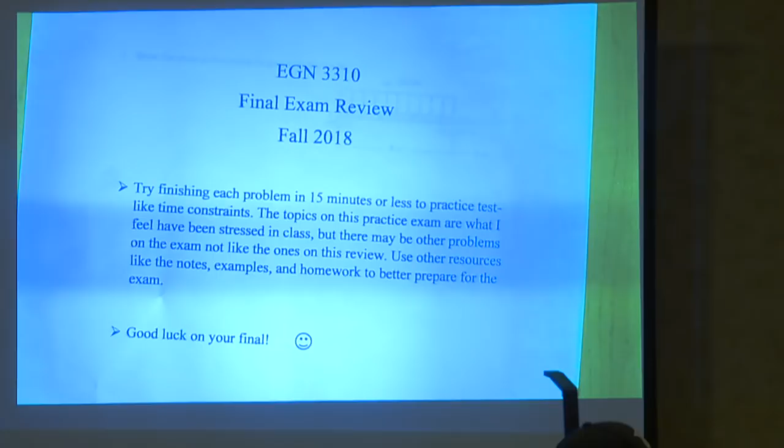Because I just want to say thank you, because I probably would not be passing this class if it wasn't for you. Really? Oh, I'm glad. Thank you, all your reviews and stuff, they've been the best. Oh, really? I'm glad. Because the first 2 reviews, I don't have to do those, but I like to do them. This one I have to do, but I love doing it. The ones you did, thank you so much - I didn't even know that was required of your job. Thank you so much, they saved my ass. I'm glad, all right.

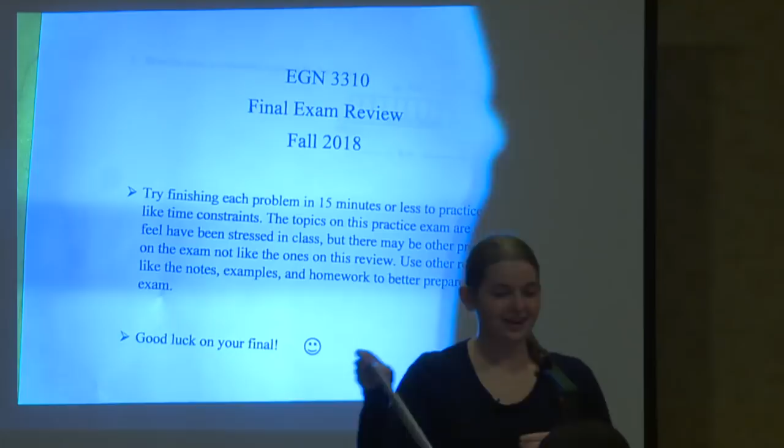How am I? I'm good. How are you? I'm fine. How are you? No questions?

Okay, cool, so is everybody able to find this online? Okay, so this is posted there. I will be posting my solutions after the review. The link to the recording for this is also there, so everything that you should need, you should be set. So on my WordPress site, if you just go to Google and type in UCFSI, click on the WordPress site, click the CECS tab, and then Statics with Tiffany, and it'll be right there. Cool, all right.

All right, oh, and go ahead, if you have your calculators, go ahead and pull them out, just because I want to make sure you guys can calculate them here. So if you're not used to using a particular type of calculator, make sure you can get the right answer here, so that way you'll be fine on the exam. So if you have your calculators, please pull them out now.

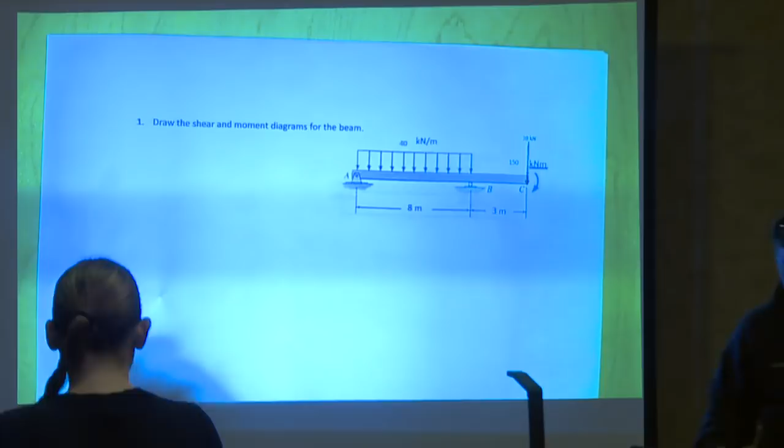Oh, that's a moment right there. Okay.

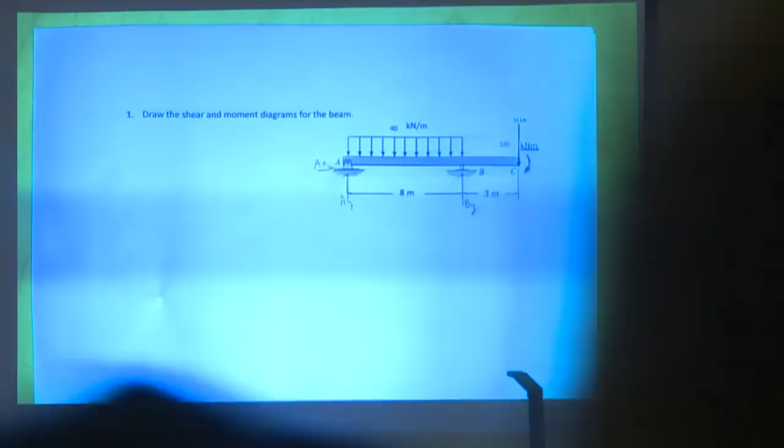No. So for the shear diagram, shear forces are what direction? Straight up and down. So that one's horizontal, so we don't need it, and it goes through every single point that we could possibly take the moment about. So either way it'd be 0, wouldn't be included in our equation, so we don't even need to worry about it. So which support reaction do you want to solve for first?

By? All right, so how do we solve for By? Take the summation of moments about A. And what do you want our positive orientation to be? Counterclockwise positive. So what should be in our equation? So By, positive or negative? Positive. So we have positive By.

What's its perpendicular distance away from A? 8 meters. So 8 meters. I'm sorry for you guys this way. So By times 8 meters. What else do we have?

So minus this 20. And what is its perpendicular distance away? 11 meters. What else? Applied moment at the end. So the applied moment at the end, the concentrated moment. Which direction is that acting? Clockwise, so it's opposite of our assumption, so it will be negative, so minus 150 kilonewton meters.

Do we need to include anything else? Distributed load. So what do we call this force right here? Is it a concentrated force? No, it's not a concentrated force, but it's an equivalent force. So get into the habit of saying equivalent, because whether it's a concentrated force or not, you'll need to know for your shear diagram. So that won't be like a jump up or down, just keep that in mind.

So what will the equivalent force be? 40, so times it, so 320 kilonewtons. Is that going to be positive or negative? So we have minus 320 kilonewtons times its perpendicular distance of 4 meters. Do you have anything else to include in our equation?

Nope, so we set it equal to 0. So then what do we get for By? If you have your calculators out, go ahead and calculate it, just make sure you get the right answer. 206.25. So is that positive or negative? Positive. So what does that tell us about our assumption? It was correct. We assumed it was going up, we get a positive answer, matches our assumption, so it is going up.

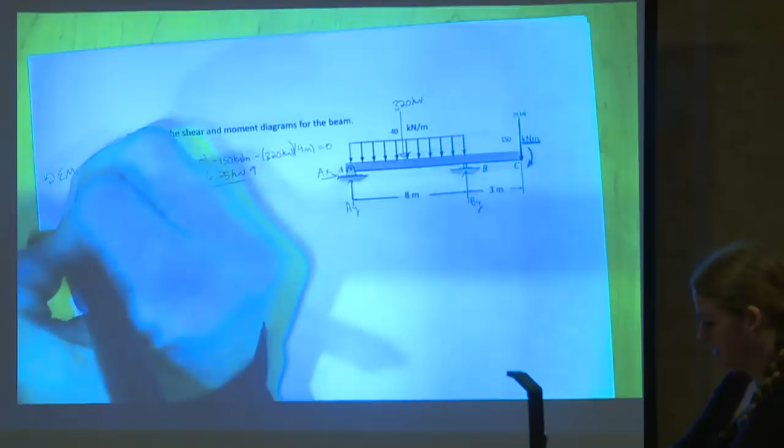All right, so what do we do now? Summation of forces in the y direction equals 0. So what are we going to have in this equation? AY. What else? Minus 320. Anything else? Plus By, which is 206.25. Anything else? Minus 20. Set that equal to 0. What do we get for AY?

133.75. So that's positive, so it matches our assumption. More tables and chairs are on their way, don't worry.

So now we have our support reactions, the only ones that we care about. All right, so what do we do next?

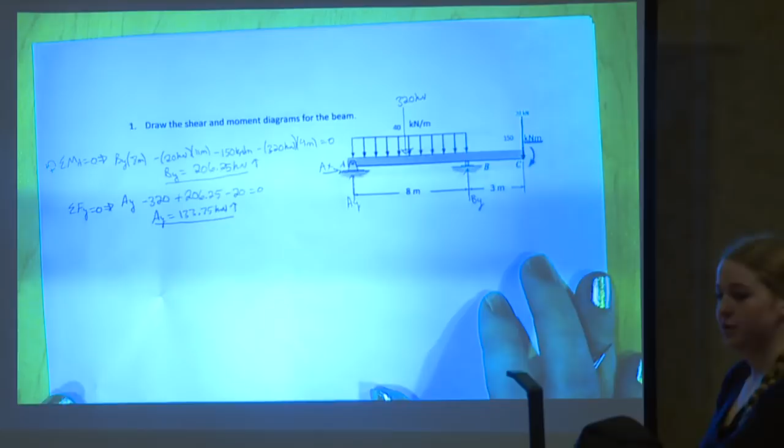So discontinuities, draw the lines. Just start drawing the lines. So where do we draw the lines on our diagram? Anywhere there's a discontinuity or concentrated force, basically you're looking for points of interest.

So what are some points of interest? Where it starts, where it ends, applied moments. So there's only one applied moment at the end, and we already have a line there, so you don't need to worry about that.

Where else do we need to include the line? Distributed load begins and ends. So we have one at the beginning, so we need one at the end. Anywhere else?

If there's a concentrated force, there's one right here, but we already have a line. Concentrated force, already a line, so we don't need to worry about any others. So then draw the lines for the shear. This is V of x, and this would be M of x for the moment.

Okay, what do we do next? Start sweeping from left to right. So I'm going to go ahead and write: integral method.

Okay, so what's the basic setup for the integral method? Where do we start? Point, and then what? Point, then span, until we get to the very end. So I'm going to draw a little line.

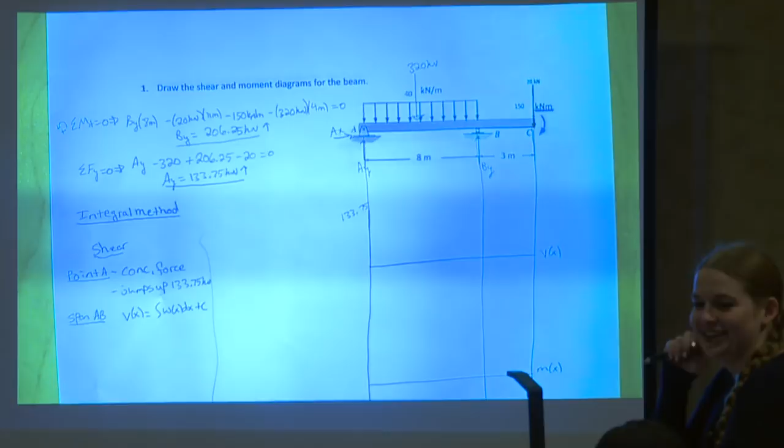Does the equation of a line sound familiar? So we need the slope, the equation of a line. So omega x is equal to y, which is equal to mx plus b. All right, so what is the slope?

40. So think slope is rise over run. So how much does it rise? It's not rising at all, it's constant. So since there's no rise, m is 0.

But what does b represent? The y-intercept, so we're looking at the left-hand side. So what is the y-intercept? 40, so that would just equal 40. So we bring this equation back down: the integral of 40 dx, and then C was 133.75.

Now, do we need to include anything else in our equation? A negative sign. Where do we include that? Only on the integral, right in front of it. Be careful not to distribute that negative to the constant, it's just on the integral. Why do we have a negative sign there? The distributed load is pointing down, so it's a negative shear, so you have to include that negative sign. If the slope is negative, you include the negative sign in the integral, but if it's going down, you'd also need the negative on the outside and distribute accordingly. Does that make sense?

Okay, so let's say we have a distributed load like that, like the triangular one. Now the slope of this, is it positive or negative? It's negative, so your m would be negative. So if you have the integral and you have like a negative mx plus b or whatever, you'd also need to include the negative since it's going down on the outside, and distribute that negative to the mx and the b, since it's the entire equation of the line you plug into the integral. Make sense?

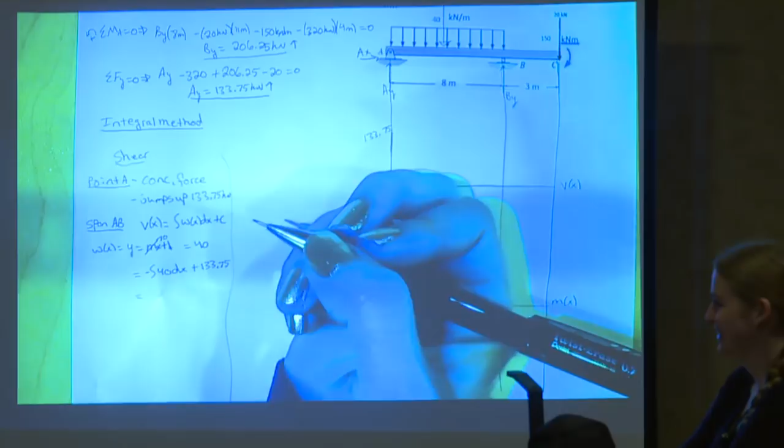Okay, so back to this one. We have our integral. So what do we do with that integral? Integrate, right. So what would we get? 40x, negative... so minus 40x plus whatever. What's the whatever? 133.75. Plus 133.75. Thank you, Cole. So that's our shear equation.

So what do we do with it? Use it at the point. We need to evaluate it at the start and the end point. So what's our start point? 0. And what's our end point? 8. So at x equals 0, shear is equal to what? 133.75 kilonewtons, and if we look back at our diagram, that checks out with what we have, so that's good. And then at x equals 8 meters, how much is shear equal to? Minus 186.25 kilonewtons. So we have our value at the start and the end, but how do we know what it's going to look like getting there?

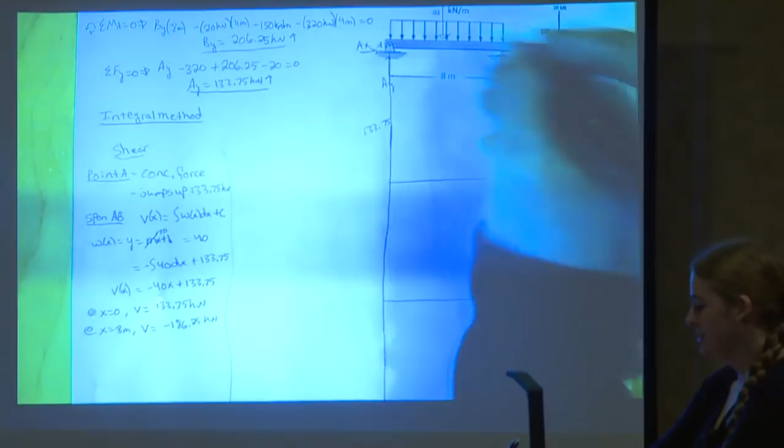What do we do next? Well, you can use that value. Do we need any other information here? So we need to find this distance. Why do we need to find that distance? To figure out where your maximum moment is. So whenever shear is equal to 0, what are we going to have? A max moment. So in order to find the max moment, we need the distance. Thank you. All right, so how do we find that value?

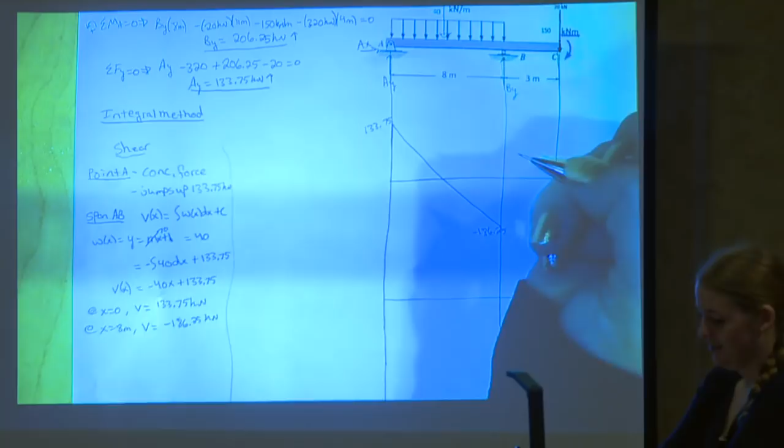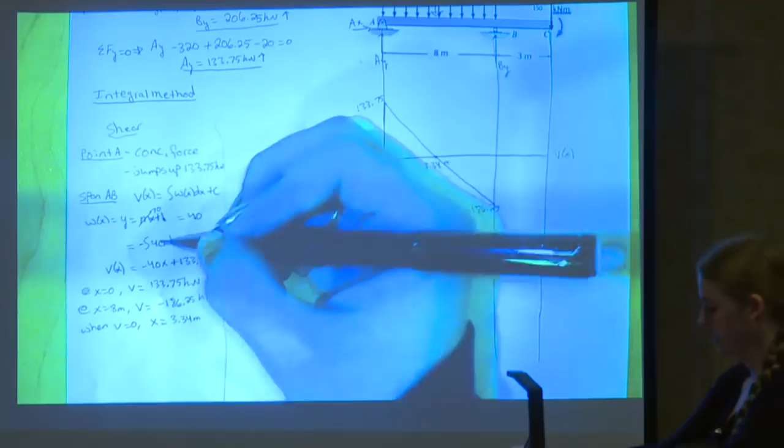So we set v equal to 0. So when v equals 0, x is equal to what? Plug in a 0 for v right here, and then solve for x. So it would be this divided by 40, which is what? 3.34 meters. All right, so that is 3.34 meters. How did we get that? We know that when shear is equal to 0, we have a max moment. So if we go back to our equation, plug in a 0 for shear, then we can solve for x. Move the 40x over, divide 133 by 40, and then we find it.

All right, do we need anything else for this span now? No? So where do we go next? Point B, back to point span, point span. So at point B, what do we ask ourselves at a point? Is there a concentrated force at B? Yes, so there is. So what's going to happen at B? It's going to jump up, by how much? By the value of B, which is 206.25 kilonewtons. So what's that going to give us for a value? Where are we going to end up right here? We're going to end up at 20. All right, do we need to do anything else for that point? So where do we go next? Span BC.

All right, and what do we do for a span, for the integral method? Nothing, why? So there's nothing there, there's no load whatsoever, so we can say that there is no change. So it's going to be what? Constant 20. So a constant of 20.

All right, so we go back up here, draw a straight line over, and then where do we go? Point C.

All right, so what do we ask ourselves at a point? So is there a concentrated force? Yes. So what's going to happen? So it's going to jump down by how much? 20 kilonewtons. So we go back up here, jump down at 20.

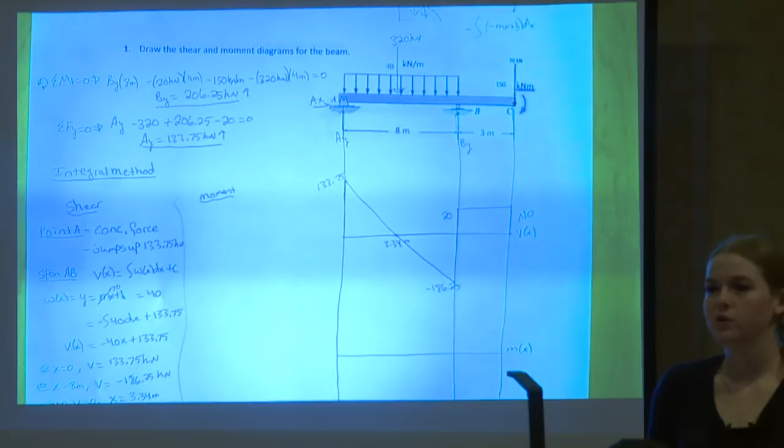All right, so what do we do for moment? We use the shear diagram. So we use the shear diagram. So do we do the same point span, point span? Yes, so we look at point A.

Now what do we ask ourselves for moment? Is there an applied moment? So is there a concentrated moment at A? No, so there's no concentrated moment. So what's going to happen? Nothing, so no jump.

All right, so we do point. Now what's next? So span AB. All right, so what do we do for span for the integral method for moment? So the integral of shear. So m(x) is equal to the integral of v(x) dx.

Anything else? Plus c. Now what is the plus c in this case? 0, because the left side of the span we're looking at was 0.

All right, so what was our equation for shear for that span? So minus 40x dx and then plus 133.75. Well, that was for the other ones. We include that. Yeah, so don't be like me, make sure you include it in the entire thing. And then the plus c was 0, so we just leave it like that.

All right, so if we integrate that, what are we going to get? So minus 20x squared plus 133.75x. All right, so that's our m(x).

So what do we do with this equation? So plug in the endpoints, which is what? So 0 and 8 again. So we can say that x equals 0. Shear is equal to what? Moment is equal to what? 0, which checks out with what we have on our diagram.

So that's good. And then at x equals 8 meters, how much is moment equal to? So minus 210 kilonewton meters. All right, so we know we need to get from here to negative 210.

So how do we know what that's going to look like? The circle, so now we use the circle. So what's the mnemonic for that? Please don't neglect infants, neglect dumb people instead. I'll draw that bigger next time.

All right, so how do we use this? Look at your shear diagram. So we look at our shear diagram. Do we look at the entire thing? No, so we're going to look at this section first. So is this section positive or negative? Positive, so it's positive. Is it increasing or decreasing? Decreasing. So it's going to be positive decreasing, so it's going to line up with that one right there. So we know it's going to be something like that.

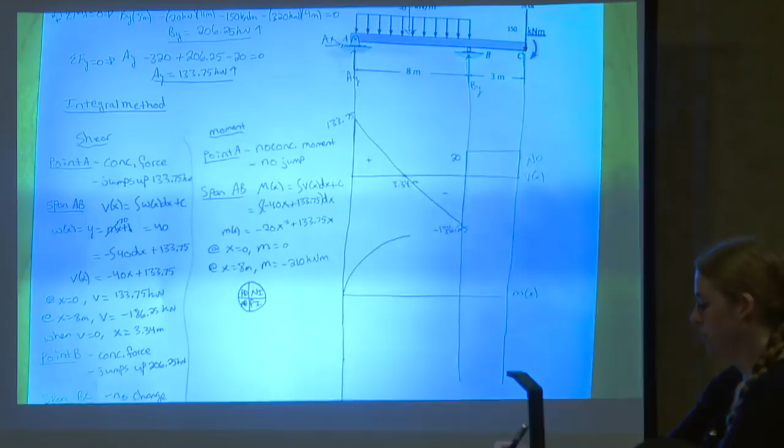All right, now we look at this one. Is this one positive or negative? Negative. Increasing or decreasing? So it's increasing. So you're going to look at the absolute value of it. So even though it's getting like a more negative number, so like a smaller number, you look at the absolute value. And if you just draw the arrows left to right and it's getting bigger, then you know it's increasing. So negative increasing will look like that. And then we know we need to end back down to negative 210.

All right, do we need anything else for the span? The max moment, so the max moment. So how do we find the max moment? Evaluate it. So we evaluate that equation at 3.34 because that's when shear was equal to 0. So what do we get? 223.61 kilonewton meters. So this value, so this is like right there, so that point is 223.61.

All right, now are we done with this span? Yes, so now where do we go? Point B. So is there a concentrated moment at point B? No, so what's going to happen? So no concentrated moment.

So no jump. All right, so then where do we go? Span BC.

All right, so what do we do for a span? So we use the integral, which equals the integral of v of x dx plus c. All right, what would our plus c be in this case?

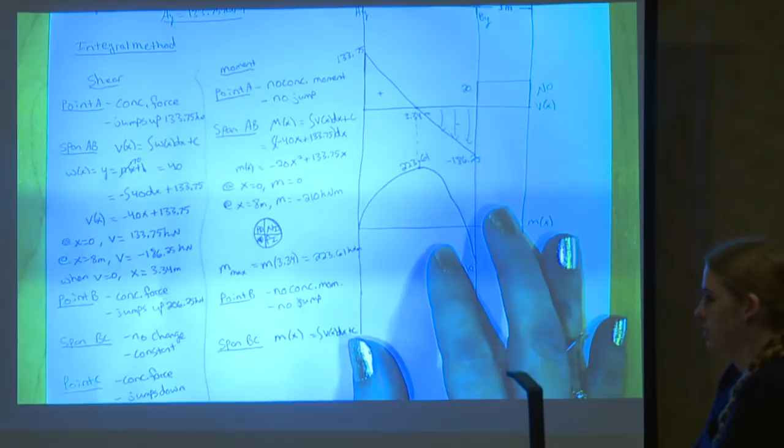Minus 210. Now over here for BC, for the shear, we didn't have an integral, but what would it be? How would we figure that out? Yeah, so look at our shear diagram.

So if you look right here, this is our shear, like a rectangular distributed load. So if we were to solve for omega x doing the equation of a line, what would the m be? 0, because there's no rise, that would just be 0.

So we just have our plus c, which is 20. Now would that be positive or negative? Positive, since it's above the x-axis, or like where the 0 would be. So we have the integral 20 dx plus or minus, in this case minus 210.

All right, so what's the integral of that? What's the integral of 20 dx? So just 20x minus 210.

Now, do we need to include a negative sign outside here? Why not? Yeah, so we included shear in this equation, and we already include the negative sign in the shear, like if there was one. So we don't have to worry about that.

All right, so what do we do with this equation? So evaluate it. So at x equals 0, what is moment? So minus 210. So if we look at this point, that matches up with what we have on the diagram, so that checks out. And then at x equals 3 meters, what is m?

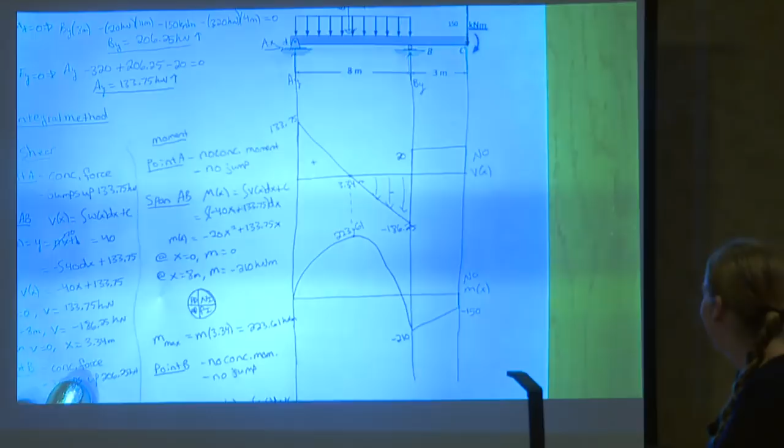Now what do we do? Yes? No. All right, now since we know we need to end up back at 0, and we got to this point, like let's say we look at the moment and we're like, which way does it jump? In this problem, it's easy to tell because we know we need to get back up to 0, so it's going to be a jump up.

But what if it was in the center somewhere, and we couldn't tell if it's going to be a jump up or down? What's the typical orientation? What do you think? So clockwise is a jump up.

So I know it's kind of opposite of normal convention. So what I just remember is it's opposite of your typical orientation. So like normally we consider counterclockwise as positive, but in this case counterclockwise is a jump down, and clockwise is a jump up.

So that's how to do that. Yes. So clockwise is always going to be a jump up, and counterclockwise is a jump down. Now, does it matter when you're doing this type of equation? No. So in this case, you can assume whatever you want. You can assume counterclockwise or clockwise, but for the concentrated moment, you have to use that convention.

Okay? Any questions on this problem? Counterclockwise is a jump down. Yes. Okay, any question? Yes.

How much work? So if you want to do it like this, just do this. So like if you do the point span, say point A, just say no concentrated force, or if there is a concentrated force, jumps up or down by this much, do it on the diagram. And that's good. Yeah, as long as you write it out. So like right here, span BC, when there was no change, just be sure to write no change, constant, so that way he knows what your thought process was. Yeah, that's good enough. All right, any questions?

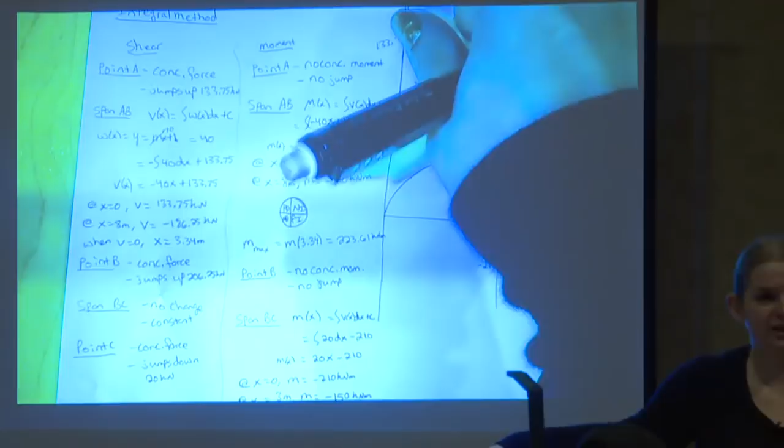It's a lot easier to do if you have a rectangular distributed load. If you have the triangular one, it's pretty easy to do the shear. But once you get to the moment, you have to know how to find the area of a parabola or something. So that's how you do that.

Any other questions? No? Okay, so we're going to move on to the next one. So what type of problem is this one?

Another shear moment diagram. All right, so what's our first step?

Can you guys quiet down so that way everybody can hear, please? Thank you. All right, so shear moment, so what do we do?

Or like what method? Integral, because that's how I did it. All right, so what do we do for the integral method?

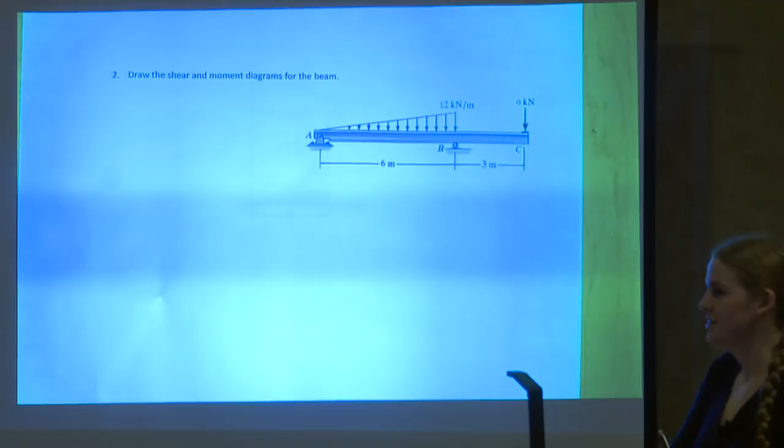So the reactions, so what type of supports do we have? So pin and a roller again, so we have 2 for the pin.

AX, do you even care about AX? No. I'm still going to draw it though. BY. All right, so what do we do next?

So go, whatever I want. So draw the lines. So where do we draw the lines?

So the beginning and end. Where else? So at B, YB. So it's the end of the distributed load, and there's also a concentrated force there.

All right, anywhere else? Nope, there's no concentrated moments. That's the only concentrated force there, there, and there, so we have all bases covered. So we draw lines for shear.

All right, so what do we need to do now? So find the support reaction. So which one do you solve for first? So BY. So we take the moment at A, and we'll just stick with our normal convention.

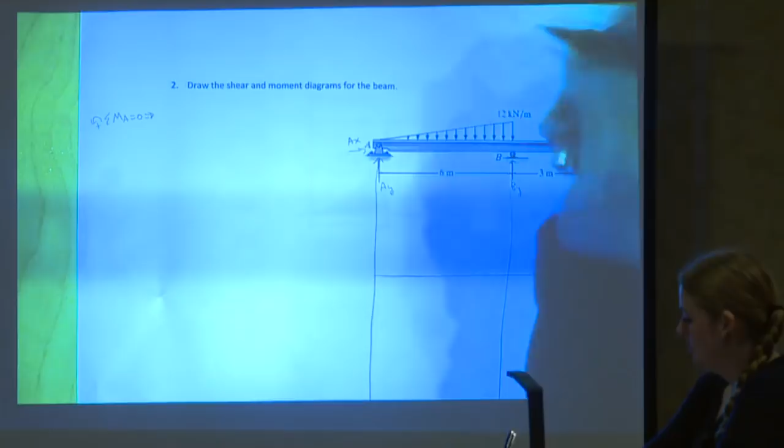All right, so what are we going to have in this equation? So the equivalent force, so where's that going to be located right here, though? 1/3 from the right angle, so 2/3 from this distance, so this is what right here? So that's 4 meters. Now what is this equivalent force going to be?

12 times 6 divided by 2, 36 kilonewtons. All right, so which one do you want to include in our equation first? 36, so is that going to be positive or negative? We have minus 36 kilonewtons.

And then what is its perpendicular distance away? So 4 meters, or 2/3 of 6. Okay, what else do we have?

So BY, is that going to be positive or negative? So plus BY, what's its perpendicular distance? So 6 meters, anything else?

The 6, so that's going to be minus 6 kilonewtons. And then its perpendicular distance? Right, do you have anything else in our equation?

No, so we set it equal to 0. And then what do we get for BY? 33 kilonewtons. So it matches our assumptions and it's positive, so it was going up.

All right, and then which one do we need to solve for now? So AY, so we do summation of forces in Y equals 0. So what do we have?

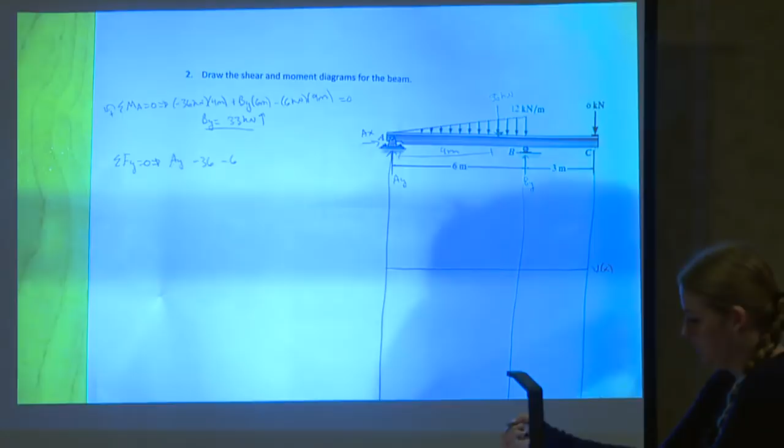So we have AY. What else? Minus 36, minus 6, plus BY, and BY was 33. Anything else? So that equals 0.

What do we get for AY? So we get 9 kilonewtons, and again, it's going up. All right, so what do we do now?

So start the diagram. So I'm going to write integral method again. Okay, so for shear, so what do we do for shear, for integral method?

So point span, point span. So we're going to look at point A. So is there a concentrated force at point A? So there is a concentrated force.

So where's it going to jump? And by how much? Jumps up by A, which is 9 kilonewtons. So we start at 0 and then jump up to 9.

All right, anything else for this point? Nope, so we go to which span? So span AB. So we need to do our integral equation.

All right, what is our plus C in this case? 9, so it's at the left side of the span that we're looking at. All right, and then so how do we find omega x?

So omega x, I'll just plug in. This equals the equation of a line, so mx plus b. So what is m? It's 2. How do you get that? Rise over run, so the run is 6, x, and b was plus 0, our y-intercept, which is 0.

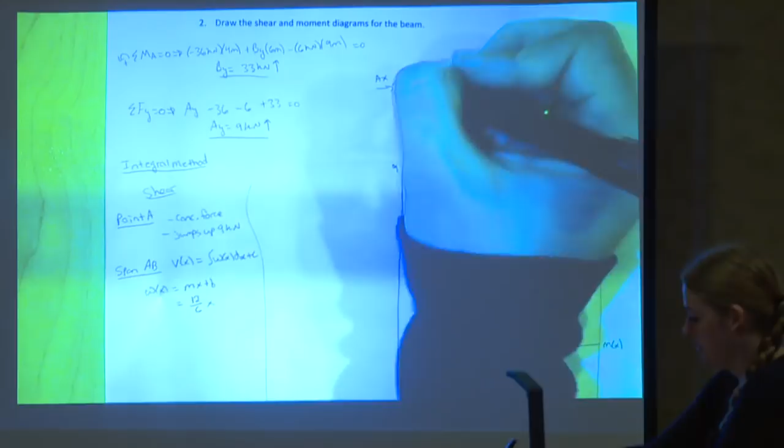That gives us 2x. So what do we do with that 2x now? We plug it back into our equation.

So do we need to include anything outside of this integral? The negative. The shear distributed load is going down, so we need to include a negative right there. So we'd have a negative integral of 2x dx plus c, which c was plus 9. So what does that give us when we integrate? Minus x squared, plus 9. That's our shear equation.

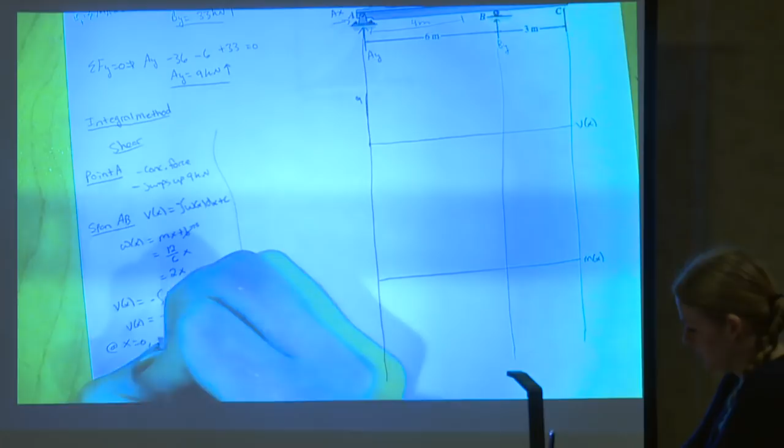What do we do with this? Our endpoints are 0. When x equals 0, shear is equal to 9 kilonewtons. If we go back up here, that checks out with what we have, so that's good.

What other value do we plug in? 6 meters. So x equals 6 meters, shear is equal to minus 27 kilonewtons. So we need to get to here, minus 27.

So how do we know what it's going to look like? Look at our equation. This is our equation, so it's minus x squared. If it's x squared, it's going to look like a parabola, and that negative sign tells us it's going to be concave down. Let me see if I can draw it.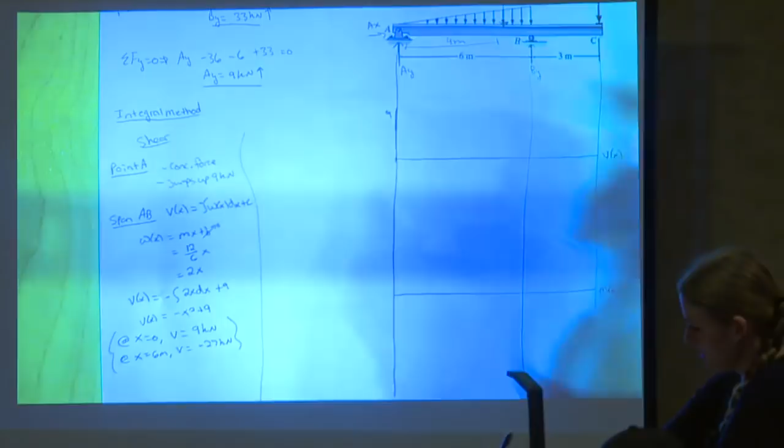Okay, so that's supposed to be a parabola. And this value was minus 27.

Are we done with this span? No, why not? We need to find this x value right here. So again, when shear is equal to 0, x is equal to what? Plug in 0 right here, solve for x, so x is equal to 3 meters. That's 3 meters right there.

Now are we done with the span? Yes, so where do we go next? Point B.

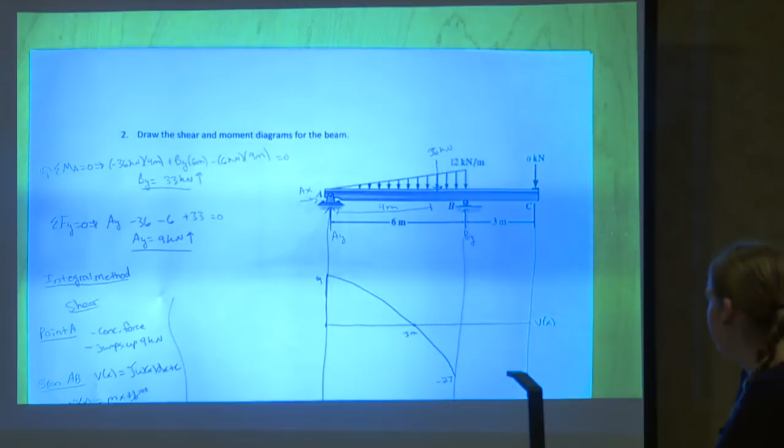Is there a concentrated force at B? Yes, so it's going to jump which direction by how much? There is a concentrated force, so it's going to jump up by 33 kilonewtons. What's that going to give us for a value right here? That's going to give us 6.

Where do we go next after point B? Span BC. What's going on with span BC? Absolutely nothing as far as we're concerned, so no change. It will be constant.

Now where do we go? Are we back at 0 yet? No, so we need to look at point C. Is there a concentrated force at C? Which direction is it going to jump by how much? It jumps down 6 kilonewtons, by 6 kilonewtons.

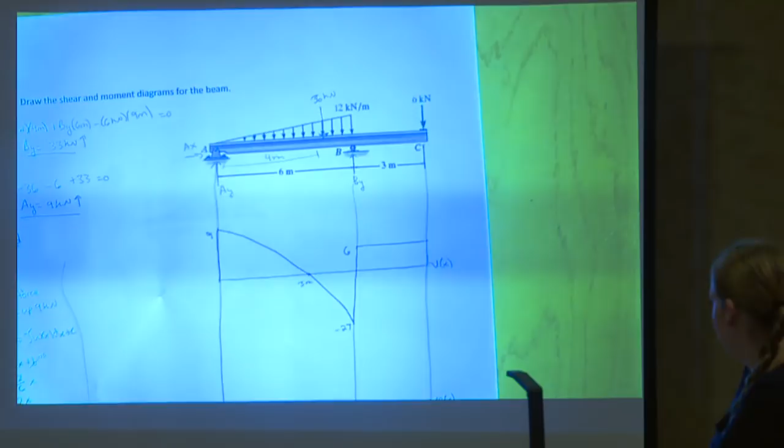And then we end back at 0. Are we done now?

No, I just want Zorn to watch this and see. It's okay, I'll show him, don't worry.

Are we done with this side, or with the shear? So where do we go next? Moment.

So again, we start with point A, so point span, point span. Is there a concentrated moment at A? No concentrated moment, no jump, so we just stay at 0 for right now.

Now where do we go? Span AB. So we need our equation, the integral of v of x dx plus c. What would our c be? 0 again, because the left side is just 0. So what was our shear equation?

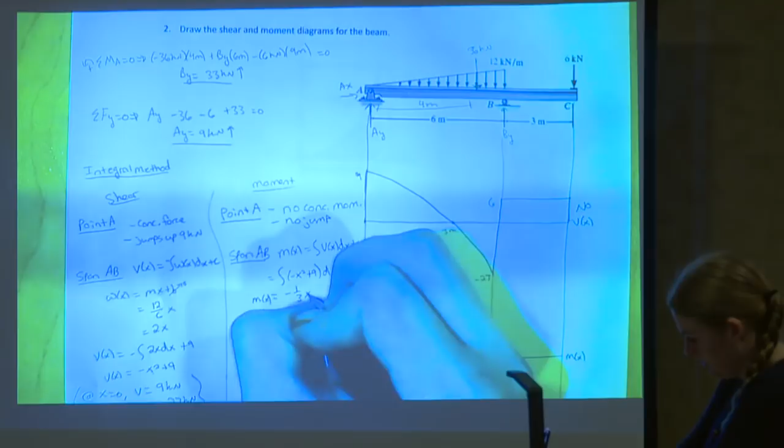We had minus x squared plus 9 dx plus 0. When we integrate that, what are we going to get? Minus 1/3 x cubed plus what? Plus 9x. So what do we do with that equation?

Endpoints, so at x equals 0, what is moment? 0, which checks out with what we have here, so that's good. What other value do we plug in? x equals 6 meters. Moment is equal to what?

Is it 0? So minus 18. All right, so how do we know how to get from here down to here? You just don't?

No, please don't. Okay, that makes sense. So use the circle.

So we look at this side, is this positive or negative? So this is positive. Is it increasing or decreasing? So it's going to be positive, decreasing. So it's going to look like that.

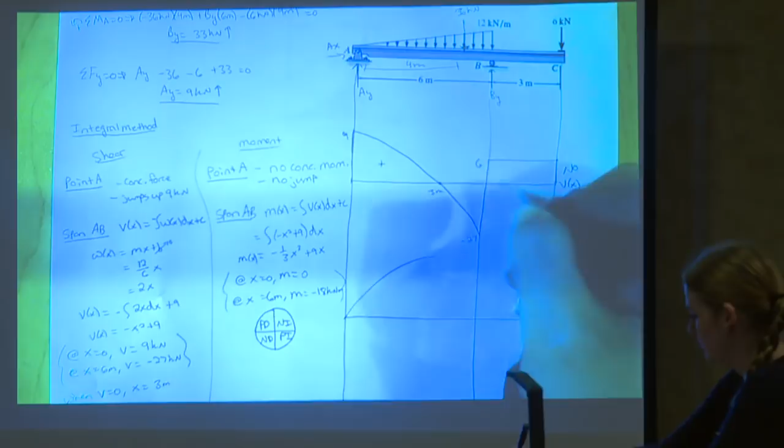All right, now we look at this section. Is this positive or negative? Increasing or decreasing? So it's negative, decreasing, so it looks like that. And we know we need to get down to minus 18.

All right, do we need to do anything else for this span? So the max moment, M max, is equal to M at what value? 3 meters, which is what? 18 kilonewton meters.

So this right here is 18. All right, are we done with this span now? Yes, where do we go next? So point B.

So is there a concentrated moment at B? No, so we say no concentrated moment. So no jump. All right, now where? Span BC.

So what do we do for this? So we need our moment equation.

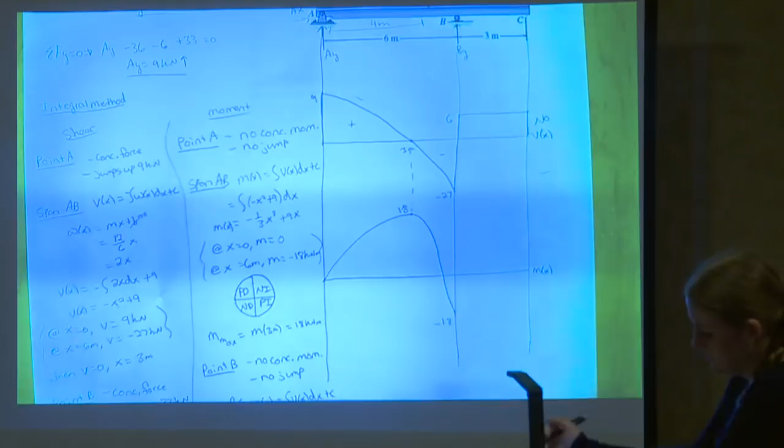Okay, so what goes inside this integral? 6. Positive or negative? So positive since it's above. What is our plus C? So minus 18.

So what's that going to give us for our equation? So 6x minus 18. What do we do with this equation?

So plug in our values. So x equals 0, M is equal to what? Minus 18 kilonewton meters. And if you look back up here, that checks out with what we have.

So that's a way to confirm. And then at x equals 3 meters, what is the moment? 0.

All right, so how do we know how to get from here to here? So it's constant. So if you look at our equation, so it's 6x and it's positive, so it's going to be linear going up with a positive slope. Back to 0. All right, and then what do we do?

Okay, I'll write yes this time. Yes. When he asks for maximum moments, isn't it also the highest and lowest? It depends on what he asks for, because like back in math class, it depends on a certain value, but he should specify what it is. So the maximum moment in this case would be 18, and it depends on if it's the magnitude. If it's the magnitude, then it's technically the same. If not, then yeah, he should specify.

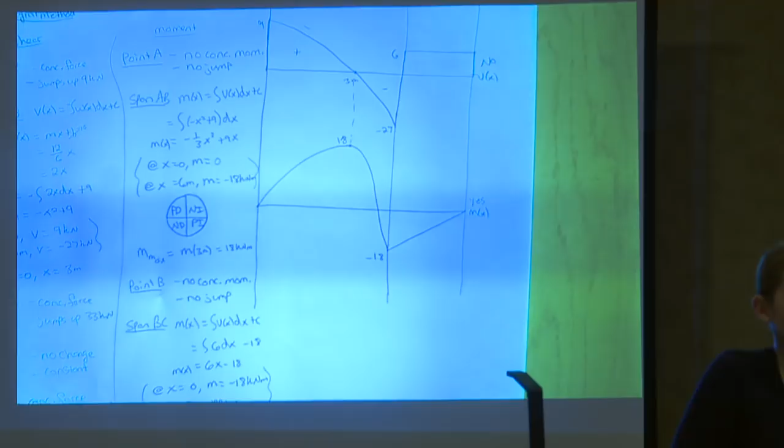No, there's no moment. There would only be a concentrated moment at A if it was included, or if it was a fixed support, then there would be that concentrated moment. Cool. Any other questions?

Yes? So where you draw the line, it's always going to be beginning and end of the beam, beginning and end of a distributed load, wherever there's a concentrated force, and wherever there's a concentrated moment.

So if it's an internal hinge or an internal pin, since it's only internal, you wouldn't have to draw that, because for these you're only looking for external concentrated forces or concentrated loads. So this force right here is not a concentrated force, it's just an equivalent force. If that was a concentrated force, then we would draw a line there, but it's not.

So just make sure you can tell those apart. Did you determine X to be 3 meters? Yes, 3 meters. Did I write it wrong? Yeah, so 3 meters right here and then right here. Okay, any other questions? No?

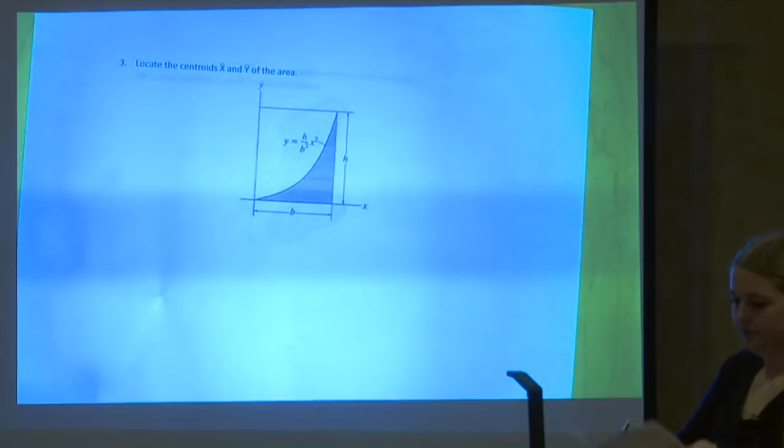Okay, so let's move on to the next one. All right, so what type of problem is this one? Centroid. So what is our general equation for this type of centroid problem?

You don't remember off the top of your head? So x bar is equal to what? So integral of x dA. What goes on top of this x? A squiggly, or tilde, whatever. It doesn't matter. When I took this class, my professor actually used the word squiggly, so it's permanently embedded into my brain. Okay, and then what goes on the bottom?

Integral of dA. And then what about y bar? Same thing, but with a y. Squiggly.

All right, so based on our equation, what are we going to need to do? Or like, what do we need? So we need dA, and we need x squiggly, y squiggly. So how do we find those?

What do we need to draw? Squares? Is it square? It's a rectangle. So which one do you think would be easier to use, the horizontal or the vertical? So yeah, in this case it would be the vertical one.

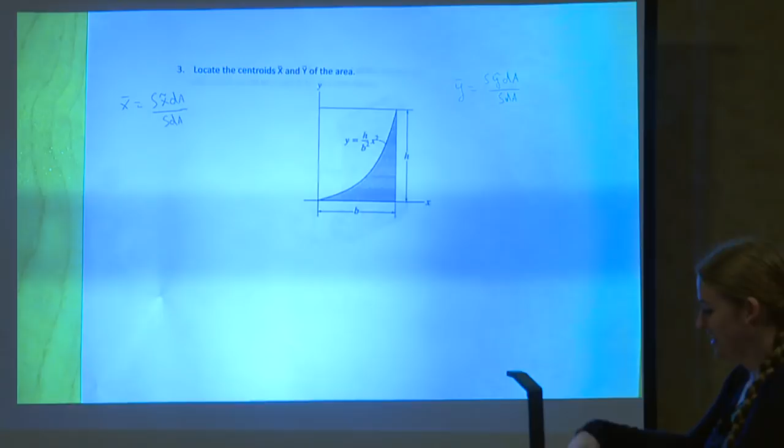After you're done with that, if you want me to just show you the solution for the horizontal one, I will. It's a lot less pretty, but I'll show you the two of them.

All right, so what does x squiggly and y squiggly represent? So the location. So the centroid of what? So this represents the centroid location of our differential element. So y squiggly is going to be from the x-axis to right here, and then x squiggly is going to be from the y-axis to right here.

All right, so how do we go about labeling this? Like, first of all, what is this value right here? That's dx. Now, how do we know what to label x or y? What's this value right here?

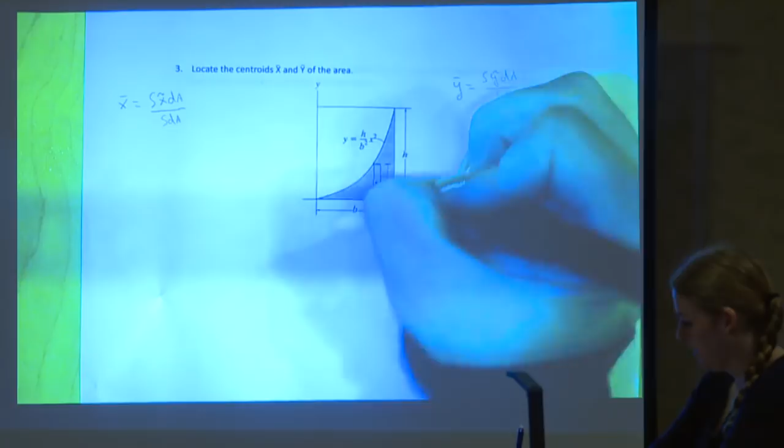So this entire length is y, so what's this distance to right here? So y over 2, which is equal to y squiggly. What's this value right here? So x, which just happens to be what? So x squiggly as well.

Now, is anyone confused on how to label them, like what you label as x or what you label as y? Yeah, y over 2. So y squiggly is the distance from the x-axis to the centroid of the element. So if this whole thing is y, then this is half of y. Okay, is anyone confused on how to label it? Where do you have it?

You got it? Okay, so now we need dA. So what does dA stand for? Like, what does it represent? So the area of what? Of the differential element. So the differential element is a rectangle, so the area of a rectangle is just length times width, or base times height. So what would that give us for our dA? So y dx, the height times the width, so y dx.

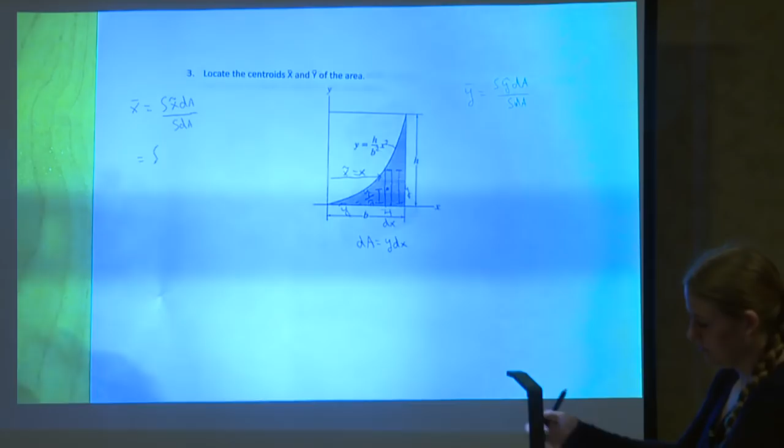All right, so let's go to our equation. So x squiggly was just what? So it's just x. And then what was dA?

So y dx. And then on the bottom we have dA, so again it's just y dx. All right, now how do we know what our boundary conditions are going to be?

So 0 to b. How do you know what's with respect to x? Because we have dx. If you remember back in calculus, when your professor would read this, it'd be the integral of something with respect to x. So if your differential is with respect to x, your boundary conditions also have to be with respect to x. It's not because we're solving for x bar, it's just because this is dx. Make sense? Okay, so this would be 0 to b, and then 0 to b again.

All right, so what do we do with this equation? Can we integrate it exactly how it is right now? So what do we need to do? So replace y in terms of x. Since that's our differential, we can't change it unless we use the other element. So do we have an equation of y in terms of x?

Yes, so what is it? So you have x times, and then what was y? So h over b squared, x squared, dx. And then this would be 0 to b. And then h again, or h over b squared, x squared, dx.

Okay, can we do anything with this to simplify it a little bit? So pull out the constants, so h over b squared, 0 to b, and what goes in here now? So x cubed dx, and then again we can pull out the constants, so h over b squared, 0 to b, and then what's on the bottom, or what goes in the integral? So just x squared dx.

Now what happens with these constants? They're the same, so they just cancel. So now, if we integrate this, what's that going to give us on the top? So 1/4 x to the 4th from 0 to b, and then what goes on the bottom? 1/3 x cubed from 0 to b.

So that's going to give us b to the 4th over 4, over b cubed over 3. So what's that going to simplify to? So 3/4 b, so you can multiply by the reciprocal and then get 3/4 b. Are we done with this one now?

Yes, so we can go ahead and put a box around it. Now even though this one's in terms of variables or constants, is there a way we can still check our answer to see if it makes sense? Yeah, so just look back up here. So let's check to see if our answer makes sense. Would it make sense for the centroid of this entire shaded area to be somewhere right around here?

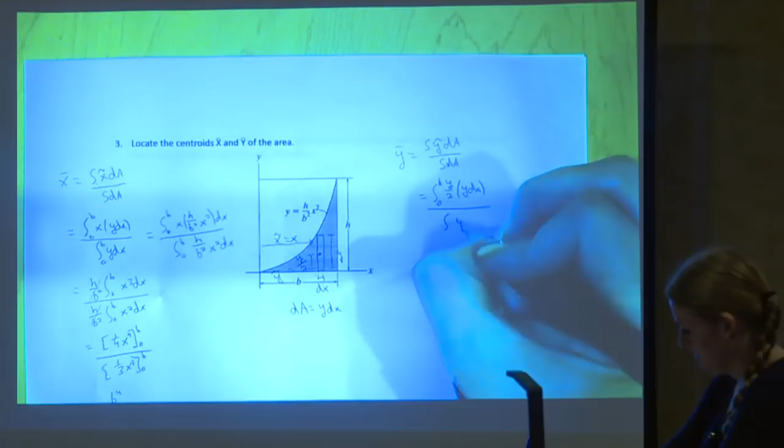All right, and then so on the bottom is dA, so y dx. And then this is also 0 to b since it's dx. All right, so what do we do from here? Can we pull anything out? Are there any constants we can pull out? So 1/2, so let's go ahead and pull out a 1/2.

0 to b. So then we just have y squared dx over y dx. Now what do we need to do with this? So plug in something for y in terms of x. So we have that equation right there, so let's go ahead and do that.

And it's squared, so h over b squared, x squared, and then that entire thing squared, dx, over the integral of 0 to b, and then y is h over b squared, x squared, dx. All right, so what would that give us once we square it?

So let's go ahead and pull out our constants in the process. So we have a 1/2, and then what is h over b squared squared? So h squared over what? So h squared over b to the fourth, the integral of 0 to b, and then what's left in the integral? X to the fourth dx, and then bring out the h over b squared, and then just x squared. All right, so what is the integral of this?

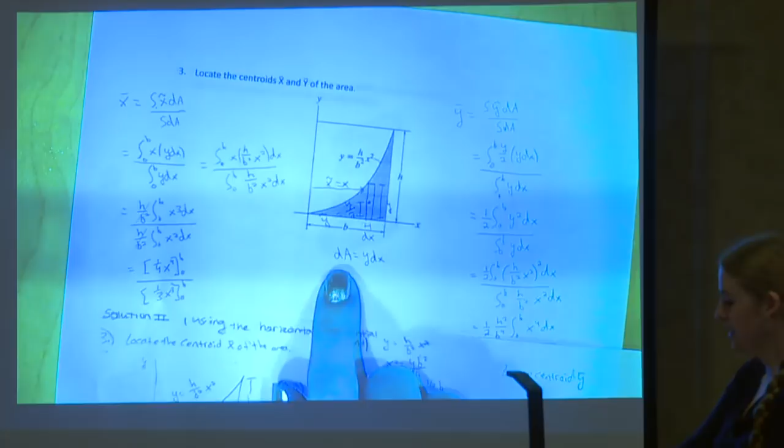So if you look at dA, it's y dx. That's as good as it's going to get, as nice as it could possibly be. And that's just x, and that's y over 2. It's not bad at all.

But if you look at this one, x squiggly is x plus b over 2, and y squiggly was just y. But then dA, where's dA? So dA is b minus x times dy. So if you plug that into this equation, you have this times that, and you have to distribute, and it's really easy to mess up. So just solve for your x squiggly, y squiggly, dA, and that's going to tell you which one's going to be easier looking.

So solve for the x squiggly, y squiggly, dA, and then that'll tell you how it's going to be. So like for this one, they were really simple. For this one, it's like something in parentheses times something in parentheses, and it just kind of ugly.

All right, any questions? Yes. 3/10 h. Yeah, so if you do it this way, you still get the same answer, but it just takes longer. But I will upload this solution as well to my WordPress site, so if you want to see it that way, go for it. All right, any questions? No? Okay.

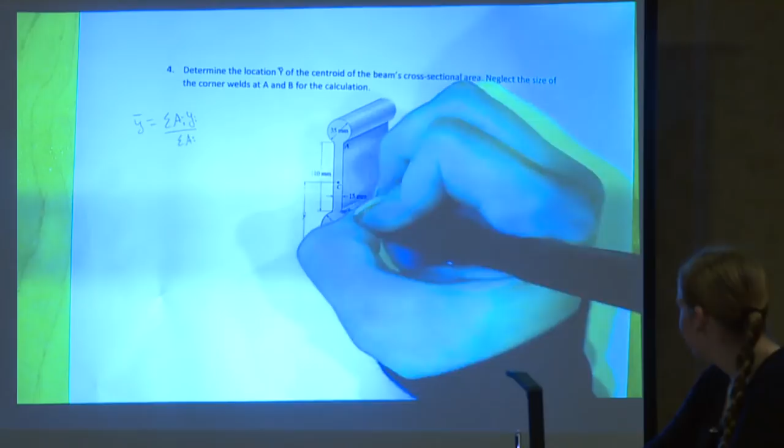Now if we make that like a circle, what's going to happen right there? Is it going to be a perfect rectangle and a perfect circle? No, but what does it tell you in the problem? So neglect those little corners so you don't have to worry about them. So let's call this figure 1, and this one's 2, and then let's call this one 3.

All right, so now that we have them labeled, what do we need to make? A table. So what do we need to include in the table? So the figure. What else? Area. And then what units is the area going to be in? Millimeters squared. All right, anything else? Or what else are we going to need to include?

This is 110. So for y, you're going to need the y distance, so we're going to need yi. What units is that going to be in? So that's millimeters. Do we need anything else?

So we need Ai times yi. What units is that going to be in? Is it squared? It's cubed. So it's squared times 1.

So let's start with figure 1. What is the area of a circle? So pi r squared. What's r? So it's half of 35, which is what? I'll just put 35 divided by 2. Be careful with this one, that's actually the diameter given, so don't look at it and immediately think it's the radius. So pi r squared, and what value will that give us?

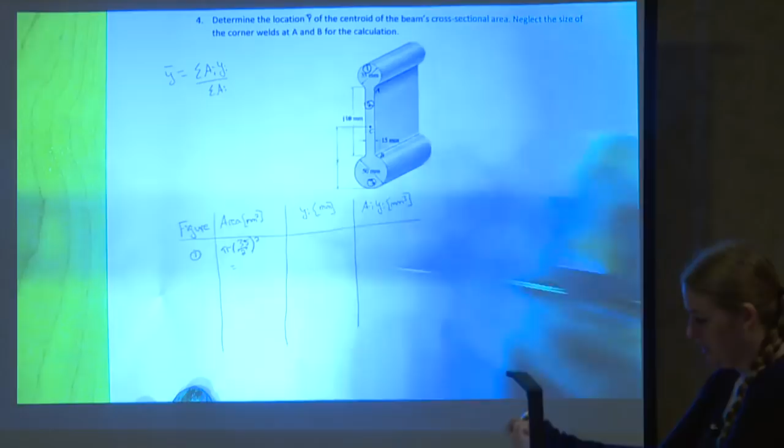962.11. Now what's yi? Or what does yi represent? So the distance from the centroid of that shape to what? The x-axis.

Now does it give us the x-axis in this case? No. So if it doesn't give it to us, can we draw it wherever we want? But can we draw it wherever we want in this problem? Why not? So it tells us where it should be. So what does y bar represent? So the distance from the centroid of the entire figure to the x-axis. So if that's the centroid, it's telling you that the x-axis has to be right here. So if it didn't give you that and it didn't give you the axes, then you can put them wherever you want, but because it shows that, that's where you have to put it. So always look for that just in case.

So the distance from the x-axis to the centroid of the circle is how much? 177.5, so you need to go up 50, up 110, and then up 17.5. And then what is Ai times yi? 170,774.525. Let's move on to figure 2.

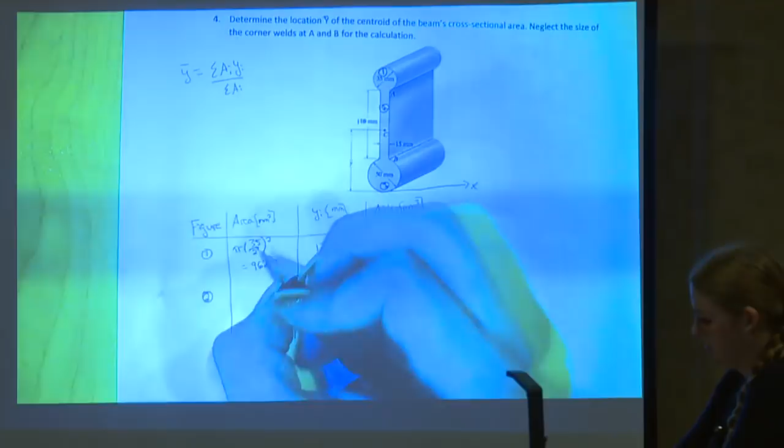What type of shape is figure 2? So it's a rectangle, so it's going to be length times width, so 110 times 15, which gives us what? 1650. What's yi? So 105, so it'd be up 50 plus half of the 110, and then what's Ai times yi? 173,250. Let's move on to figure 3.

So again, pi r squared. What's the radius in this case? 25 squared, which gives us what? So it should give us 1963.495. And then what's yi? 25, and then Ai times yi. 49,087.375. So what do we do with this chart?

So which ones do we need to find the sum of? So area, and then Ai times yi. So the sum of Ai is what? 4575.605 millimeters squared, and then sum of Ai yi is equal to what? 393,111.9 millimeters cubed. Now that we have these values, what do we do with them?

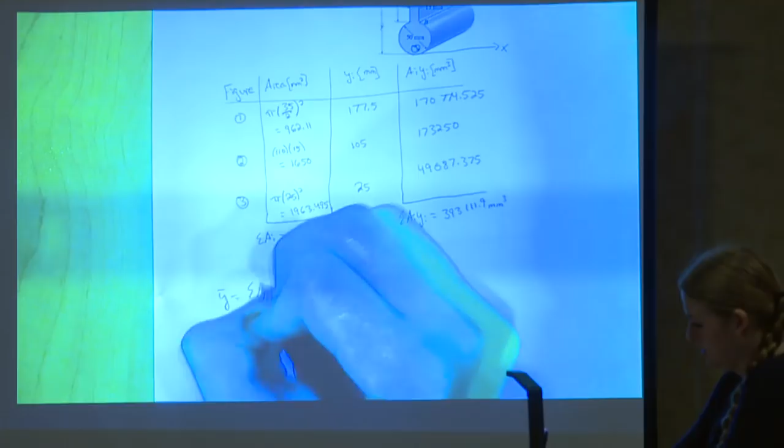So go back up to our equation, I'll write it out again. Sum of Ai yi over Ai. Which value goes on top? So Ai yi, which was 393,111.9 millimeters cubed over 4575.605 millimeters squared. So what is that going to give us for our y bar? 85.91 millimeters. Is that our final answer? Yes, so let's go ahead and put a box around it.

Now can we check this answer for the composites as well? So kind of, what's exactly halfway for this entire distance? The 50 plus 110 plus 35, divided by 2. How much was it? 97.5, so that's halfway. So this is below that, so would it make sense for it to be slightly below halfway? Yes, because the bigger circle is on the bottom. Now if it was above halfway based on the axis, then you know that it's wrong. Make sense?

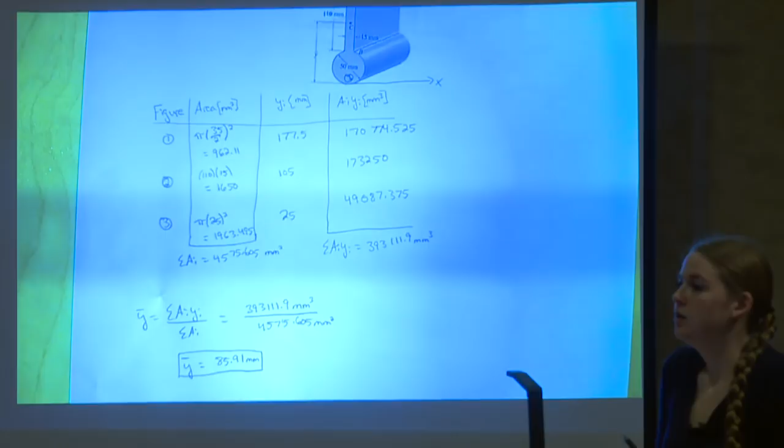All right, does anyone have any questions on this problem? Yes? The third one? This column?

This yi? Okay, so y bar is the distance from the x-axis to the centroid of the entire shape, and yi is the distance from the x-axis to the centroid of that figure. So since this one is the circle, the centroid's right in the middle, so to get this value, we have to go up 50 plus 110 plus half of 35, and that'll give us that. And then this one's half of that, so 25, and then 50 plus 110 divided by 2. Cool. Yes?

You mean start like 1, 2, 3? Yeah, you can do it in whatever, start whichever. Or do you mean where you put the x-axis?

So in this problem, the x-axis wasn't given to us, but it did tell us where y bar was. And y bar represents the distance from the centroid of the entire figure to the x-axis. So since it's saying from here to here, that's y bar. If this is the centroid, this has to be our x-axis.

If it didn't give us y bar, telling us right there where the x-axis is, then you could put it wherever you want. So then you could put your x-axis right here. Make sense? Okay, cool. Any other questions? No? Okay.

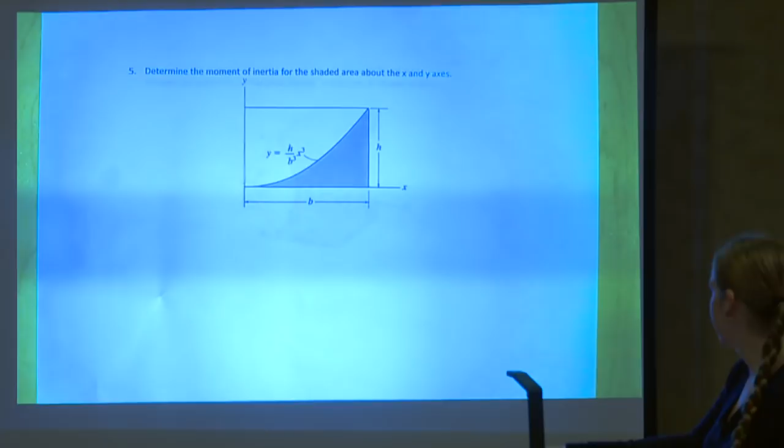So let's start with Ix. So what's the equation for Ix? So the integral of y squared dA, and then Iy is what? Integral of x squared dA.

All right, so what do we do next? So draw your differential element. Now, can we use the same one for either of these equations, or either value? Technically, yes, but if we want to use just this equation, which element do we have to use for x?

So y over 2. So for Ix, to use just this equation, are we going to use the element that's parallel to x, or parallel to y? So parallel to x.

So for this one, I'm just going to draw the two separate figures over here, so it's easier to see. All right, so for this one, let's use that.

What's this value right here? So that's dy. All right, and then so that's y, x. All right, so what do we need based on our equation?

What's that distance, or what do we label it as? Or actually, do we need that distance at all? No, so why not? Yeah, we don't care. So the equation was just y, so we don't need to worry about the y squiggly at all. All right, but what do we need?

So we have dy right here, so we need dA, we see in our equation. So we have the height. What's this length right here? Or first of all, what do we label this? So that's x.

So this distance, if this is b and this is x, what's this distance? So b minus x. So what is our dA for this case? So the area of the differential element, length times width, so b minus x dy. All right, so we plug in, so y squared, and then dA, b minus x dy.

Now, what are our boundary conditions? So 0 to b or 0 to h? So it's 0 to h. So even though we're calculating the moment of inertia about x, our differential element is with respect to y, so our boundary conditions also need to be with respect to y.

All right, now can we integrate it just how it is right now? Yes, thank you. So can we integrate it just how it is right now? No. So what do we have to do? So get x in terms of y, so how do we do that?

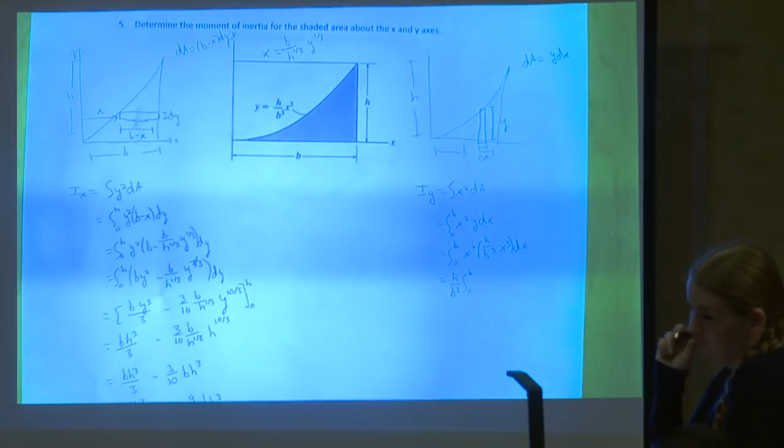So we can bring out h over b cubed, and then what's left on the inside of the integral? So x to the 5th, dx. All right, so we bring down the constants. What's the integral of x to the 5th? So x to the 6th over 6, from 0 to b.

So bring your constants down again. And then we have b to the 6th over 6. So what's that going to give us for Iy? So 1/6 hb cubed. All right, can we check this answer?

No, because it's going to be in units of distance to the power of 4. There's not much we can do with that. All right, does anyone have any questions on this problem? Yes. For Ix it was 1/30 bh cubed.

All right, any other questions? Yes.

So can you solve it with the other differential element? Yes, you can do it, but you'd have to use parallel axis theorem, and it's a lot less pretty for the integral method, like when you're doing it about areas. But you guys want to see it?

No? Some people are shaking their head like no. Okay, I'm going to show it anyways, just so you can be thankful. Like if you think this is bad, just hang on. Just one second, okay.

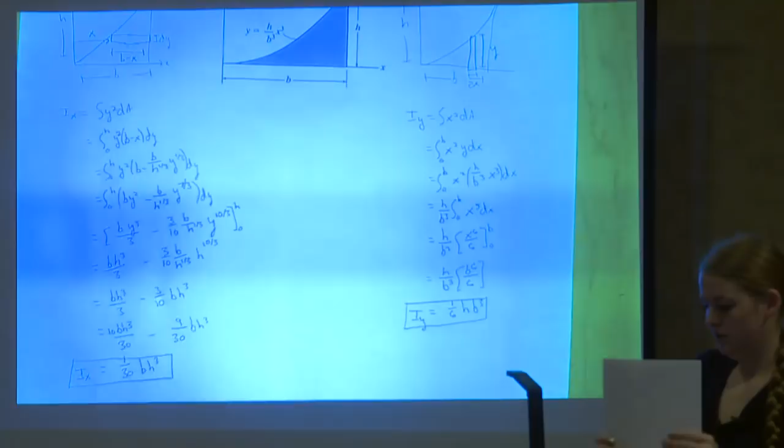All right, last problem, we're almost done. Yay. All right, so what type of problem is this one?

Composite. So composite what? So a composite moment of inertia. So we're trying to find which one? IX or IY? We know our IX is... so IX. So what's our general equation for IX for composite bodies?

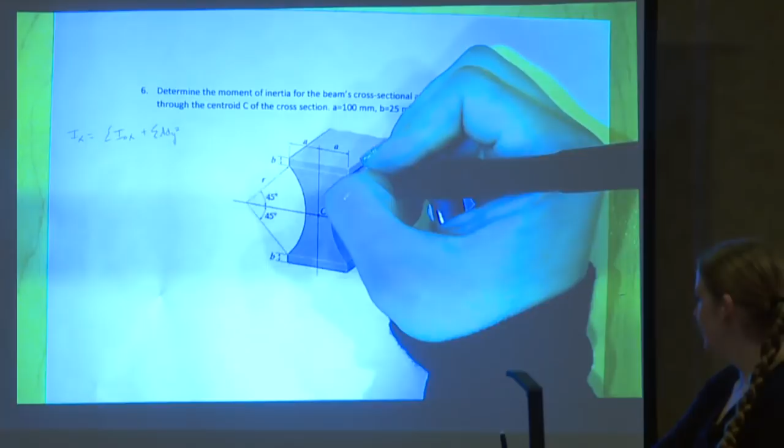So summation I naught x, A d y squared. So what's this part called? Parallel axis theorem. So again, for this case, you technically always have to use it, but in some cases it's zero, so you don't even worry about that. But we'll show that in just a little bit.

All right, what type of shape is this? A composite shape. Do you have any word to describe this though? A rectangle? Some spheres missing? Okay, so if we had like a rectangle with a little circle in it with a hole through the figure, how would we find that? So you take the rectangle moment of inertia, minus the circle.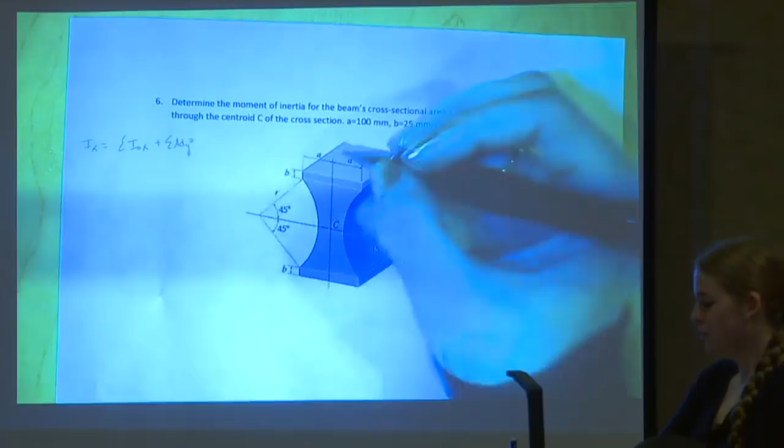So in this, what shape should we start with? So let's start with like, I can't draw, so bear with me. So you want to start with that shape, so we start with a rectangle. And what do we do to that rectangle? So subtract like these little things.

But do we know the moment of inertia for just those little shapes? No? Or yes? Let's see, yes. So if you open your book for the first time this semester, you will see we have triangles, rectangles, circle, semicircle, quarter circle, circular sector - lots of circles basically. But do you see one that's like that little sliver? No. What? Where? Yes, they add up to be.

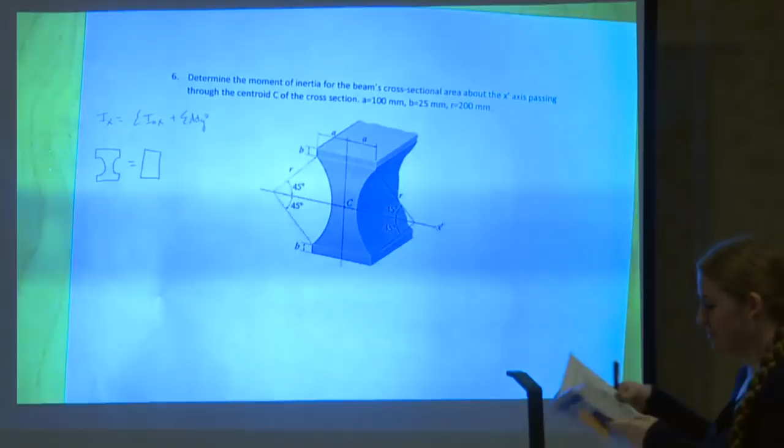All right, so based on the information that's given though, so we have a rectangle. What other shape do you see? So you see this shape, right? Do you see that shape in the book? What's it called? So is it the quarter circle? It's the circular sector area.

Huh? So there's two of them. So in this case, yeah, so it's 45 and 45, so 90. But if you look at how it's given, the one that we have is like rotated, so it's symmetrical, but this one's not. Make sense? Yeah, so that would just be a lot more work for yourself. Circular area either, semicircular? No, based on the angles that are given.

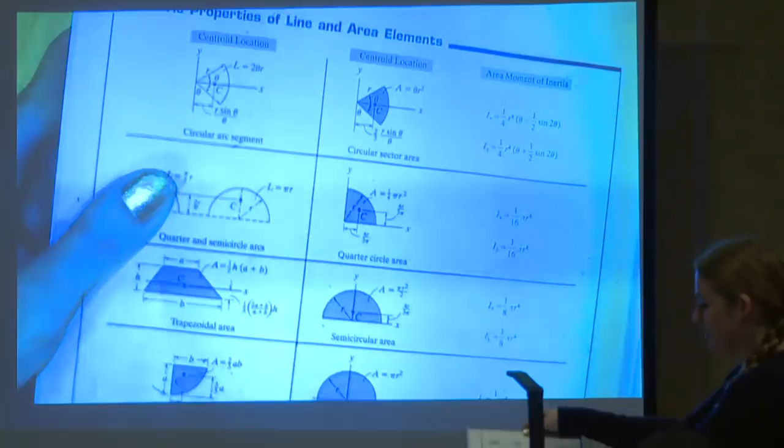All right, so we have that circular sector area. So what would we need to do with those two shapes? Would we add them? So we would subtract two. Hang on, so minus two of those. Are we done now? No. What do we have to do to it now? Do we add or subtract triangles?

So we need to add how many? 2? 4. Is it 2 or 4? 4. Yeah, that's why I did it. Who made that? I don't know, but they must hate people.

Is anyone confused on this? Everyone. Okay, hang on, give me a second. True, yeah, you could do it that way and then just subtract the triangles. There's multiple ways to do it.

Okay, hang on, I was prepared for this. You are so smart, okay. Yes, I came prepared. All right, so let's say we're starting with a rectangle, right? Yes, I did cut it. That was the hardest part of this review, trying to cut these perfectly.

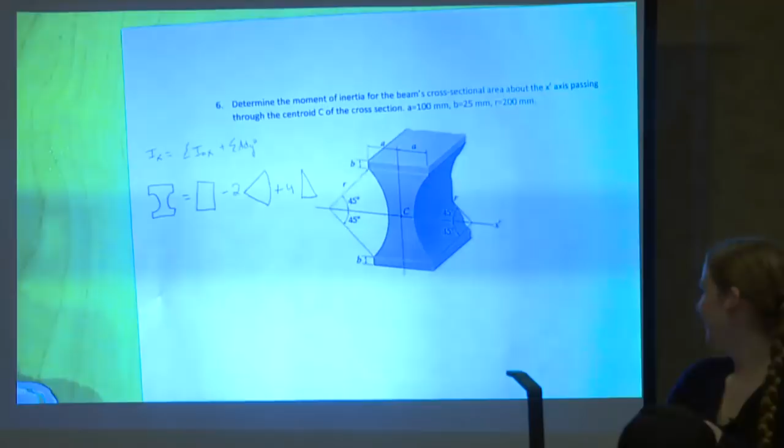All right, so let's get this out of here. All right, so back to this. All right, so minus 2 sectors plus 4 triangles. So let's start with the rectangle first. All right, so...

What is the moment of inertia for a rectangle about the x-axis? So if you're not sure, Ix is 1/12 BH cubed. So what's the base in this case? Whatever you want it to be. Whatever you want it to.

So this is A and this is A, so what's this entire length? Oh, so the base is 2A. So is the reference the base of the triangle? Yeah, so like the base of the triangle, yes.

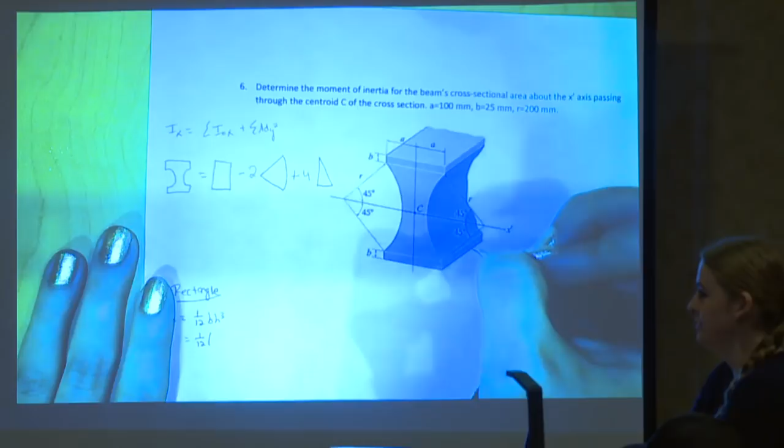These equations, are they being provided or do we have to know them? I believe he said he was going to give you this exact chart, but he's not going to tell you how to use it. So if you see some of these, the axes are going directly through the centroid and sometimes they're not. How would you know how to use that? What would you do? How would it be different? If what? Like to solve for the Ix. If the reference wasn't there?

So think back to our general equation, which was I-naught-x plus Ad-y squared. So this part is the parallel axis theorem. So what does dy represent? Distance in y from the centroid. So the distance from the x-axis to the centroid of that particular figure.

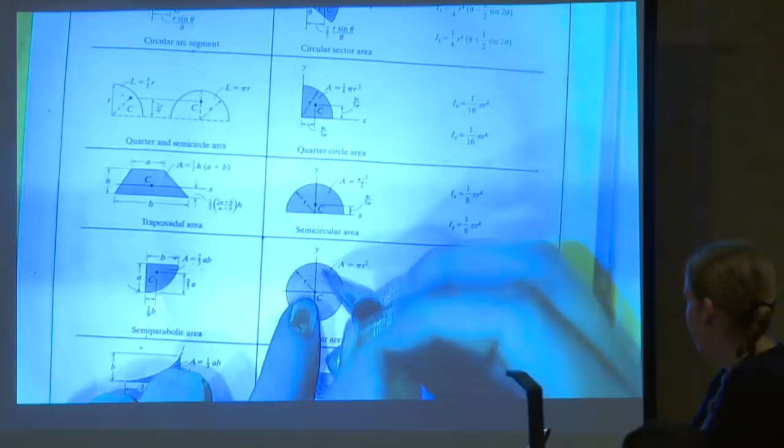So if you look right here, for the circle, what's the distance from the x-axis to that centroid? 0. So for this particular shape, if it was going directly through there, you wouldn't have to use the parallel axis theorem. For this one, you would, since your dy is going to be whatever that distance is. So that's the only difference - you just have to know if you're going to use parallel axis theorem or not. If you're ever not sure when to use it, just use it every single time, and you'll see when dy is 0 and when it's not.

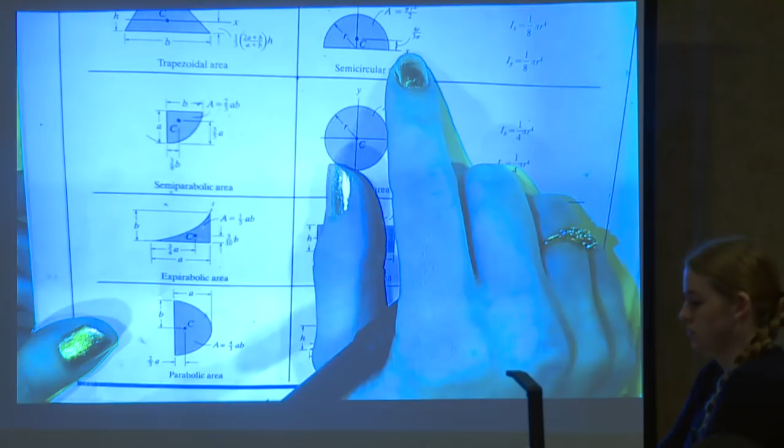Okay, so what was our base? Yes. The figure in the book? Now let's say, for the rectangle, how far from the x-axis to the centroid - what axis is that for the circle or the semicircle? Semicircle? Yes. Yeah, so if you were calculating Iy, then it would be dx, and that value is 0.

Yeah, good question. All right, so what's our base? So 2a, so 200. And then what's our height? 25. So we need this entire length, so we have b plus b. How do we find this distance right here? So r is 200, so what would this value be? So then that would be 200 sine of 45.

And then we have 2 of those plus 2b, which gives us what?

So that value, I'll just give it to you now: 614,562,289. These ones get really long. But what units is this going to be in? Millimeters to the 4th. All right, are we done with the rectangle?

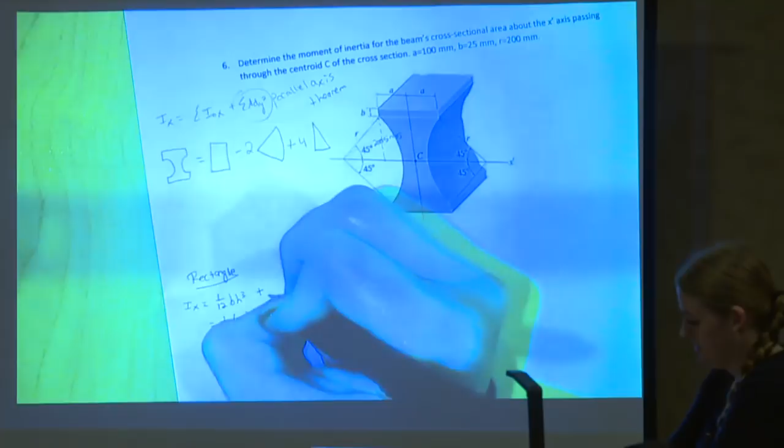No, why not? The parallel axis theorem, which includes... no, we can, I'll show you how to set it up at the end. So plus a, what's the area of a rectangle? Actually doesn't matter, so a dy squared. What's dy for the rectangle? 0. It's the distance from the axis you're taking the moment of inertia about to the centroid of that shape. This centroid also happens to be the centroid of the rectangle, so that dy is 0, so you don't have to use parallel axis theorem. But if you're not sure when to use it, just always include it, and you'll see when it's 0.

All right, so let's go to the sector area. What is the moment of inertia for the sector about the x-axis? Don't hold back, tell me how you really feel. So explain dy. Dy represents the distance from the axis you're taking the moment of inertia about to the centroid of that particular figure.

Yeah, you have a question? Another one? No? Okay, okay, so it's... Hang on, I'll answer that in a second.

1/4 r to the 4th times theta minus 1/2 sine 2 theta. Now this theta, does it matter if we keep it in degrees or whatever? Or can we keep it in degrees? Yeah, as long as your calculator is in degrees, you can leave that in degrees. What about this one? Can we leave this theta in degrees? No, you have to convert it to radians. I'm pretty sure it's because if you put it in your calculator, if you include 2 theta and your calculator is in degrees, if it's in the sine function, it recognizes that it's degrees. But if it's just out here, it won't recognize it, so you just have to convert it to radians.

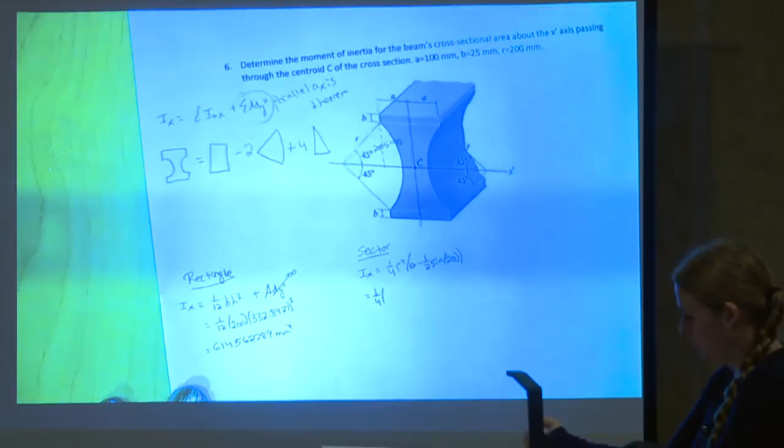So r is 200 to the 4th. So what's our theta? Is it the 90 degrees or the 45? Theta is just this little one, so 45 degrees. So what is 45 degrees in radians? Pi over 4.

Pi over 4 minus 1/2 sine. Can we convert this to radians if we want? Yeah, but then your calculator would also have to be in radians, and then if you go solve another problem and it's in radians, everything would be wrong. So I recommend just leaving this in degrees so you never have to worry about your calculator. Yes? So you need radians, probably. Yeah, so sine of 2 theta, what's 2 theta? 90 degrees.

All right, now let's say plus a dy squared. What's dy? If you're not sure, let's look back at this. This tells us where the centroid lies. So if the centroid lies on the axis, what's our dy? Our centroid would be somewhere right around here, so since there's no distance away, this is 0, so you don't have to worry about that for this shape either. All right, so this is going to be 114,159,265.4.

So you're adding in the complete sector and just subtracting out the... what? Triangles. No, we're adding the triangles. So basically I'm just finding the Ix for each individual one, and then I'll go back and plug it into that general equation. I'll take the Ix for this sector. That was Ix for the sector, right? Yes, this is Ix for the sector, the whole sector. So this is just for the one sector. So then it's overlapping the rectangle you just found, so you're subtracting it out. Yep, but you can't subtract these areas from nothing, so then you have to add the 4 back. So then you have to add it. Okay, yes, and then we have the triangle.

So Ix for the triangle is 1 over 36 BH cubed. So how do we find the base of that triangle? That would be 200 cosine 45. And what is that value?

Did anyone get like 147 or 141? For 200 cosine 45? Yeah, okay, so this should be 141.42.

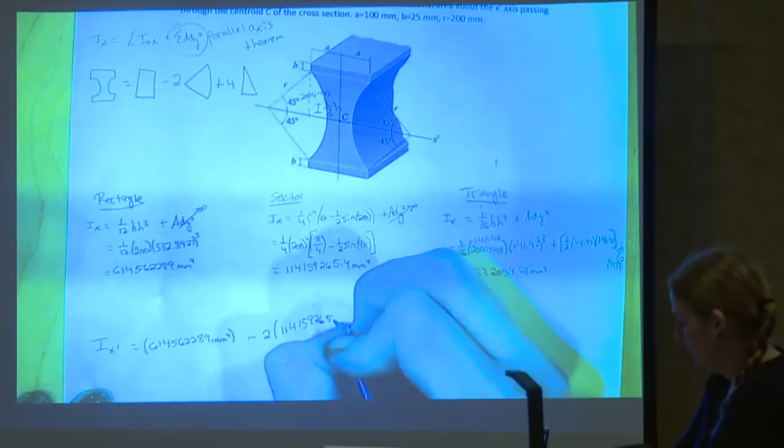Now minus 2 of this value, so 114,159,265.4 millimeters to the 4th, plus 4 triangles at 33,372,054.68.

All right, now if we simplify that, that will give us approximately 520 times 10 to the 6th millimeters to the 4th. This is our final answer.

Does anyone want to see how to show the chart if you wanted to do it that way? I think he's going to give it to you, the chart. So, yeah, I'll do the chart.

So then we would need the figure, area, I naught x, dy, a dy squared in that case. All right, so which of these values would we make positive or negative? So let's say, that's the rectangle, that's the triangle, and this is the sector.

So the sector would be negative, and there's also 2 of them. So we'd have to do 2 times which values? If you're not sure, look back at our equation. So I naught x, so that one would need to be 2 times whatever the sector is.

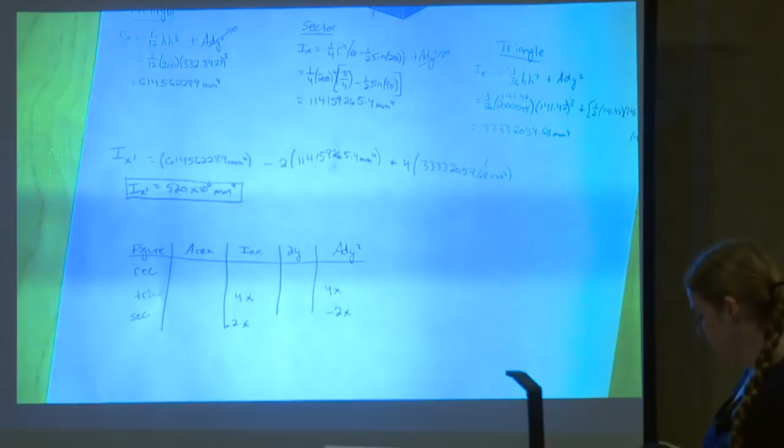Does anyone have any questions on this problem? Yes?

The triangle? Okay, so dy represents the distance from the x-axis, the axis we're taking a moment of inertia about, to the centroid of that shape. So in this case, it's a triangle. For a triangle, the centroid is located right about here, which is 1/3 of that height. Now that height is 200 sine of 45. So we take that, divide it by 3, and that gives us our dy.

Cool, any other questions? Yes. Could we have used symmetry in this case? Can we use what, symmetry? You mean like if we know the ones on this top half and then that half? So you could if you knew that shape, but do you know what that shape even is? Do you know the moment of inertia for that shape? No, so in this case you can't, so sometimes there's multiple ways to do it.

If we knew, if it was a regular shape - say circles, something like that - we could have used symmetry. So you could have covered up the bottom half and used 2 half sections, but that wouldn't work here. Yeah, so sometimes you can do it that way, sometimes there's multiple ways to do it.